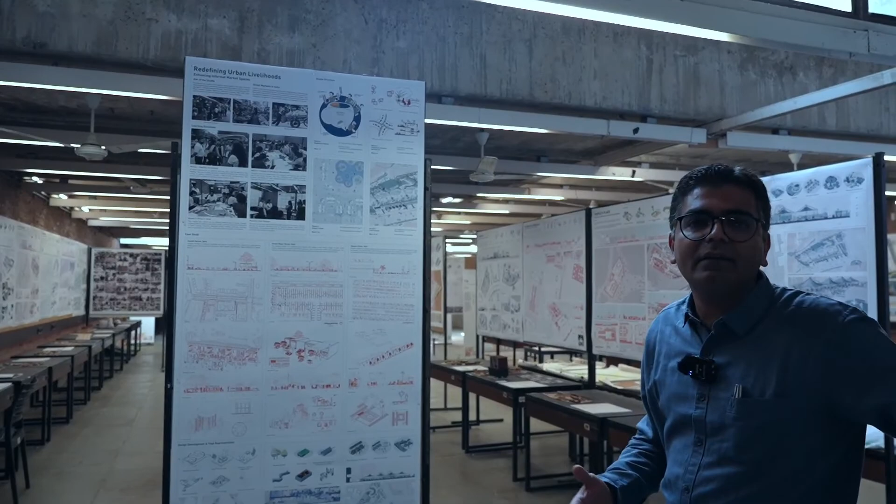For example, this is one L2 studio which talks about redefining urban livelihoods. This studio particularly focuses on designing markets. We've taken sites in Ahmedabad, 3 sites in total, and students also went to Delhi to look at how markets are designed and how they actually function, because markets are a very important part of our city, and it is the urban designer who can look at these markets and design them.

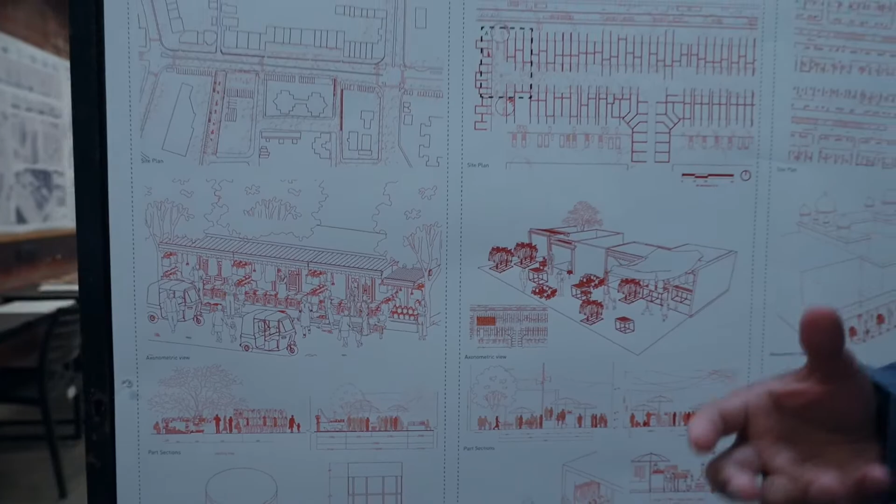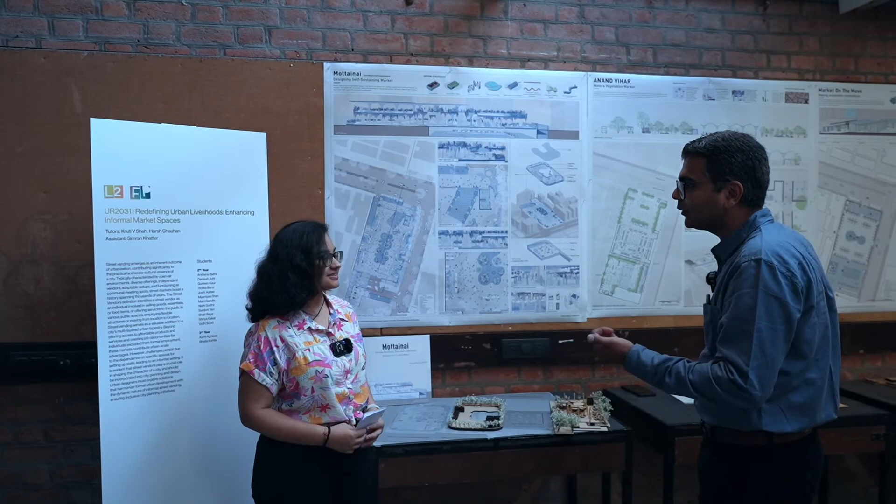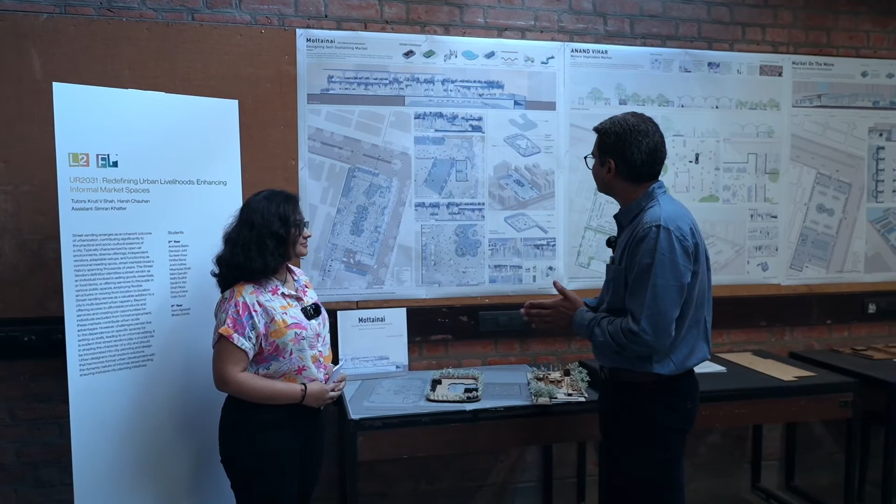With us we have Ishita. Hi Ishita, so you are looking at one of the sites - you have 3 sites, right? Yes - Motera, Vasna and Gatlodia in Ahmedabad. I think your site is Motera. Can you briefly tell us what was your idea behind the project while designing this?

When we asked the vendors and shoppers about the challenges faced in the market, they said that waste is generated and cleared only in the morning, so the whole day waste accumulates. To tackle this, I tried to design a waste management system with on-site composting units, which can be used for the landscaping area and the vegetable garden.

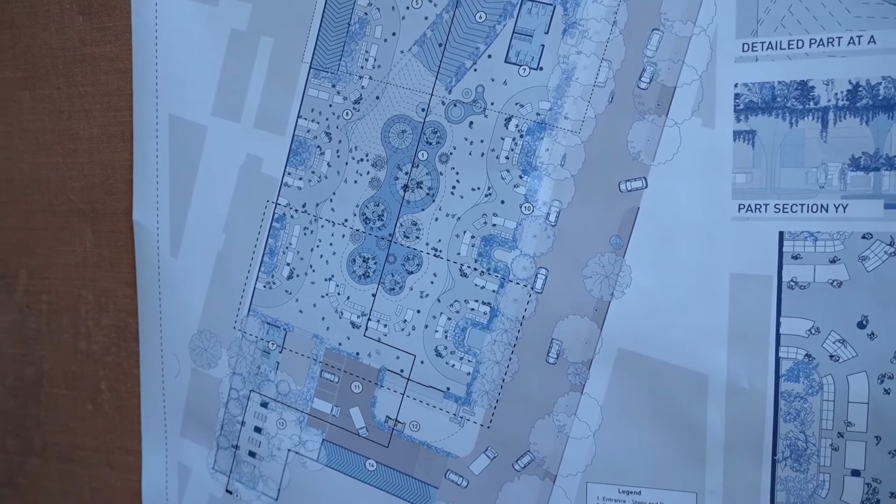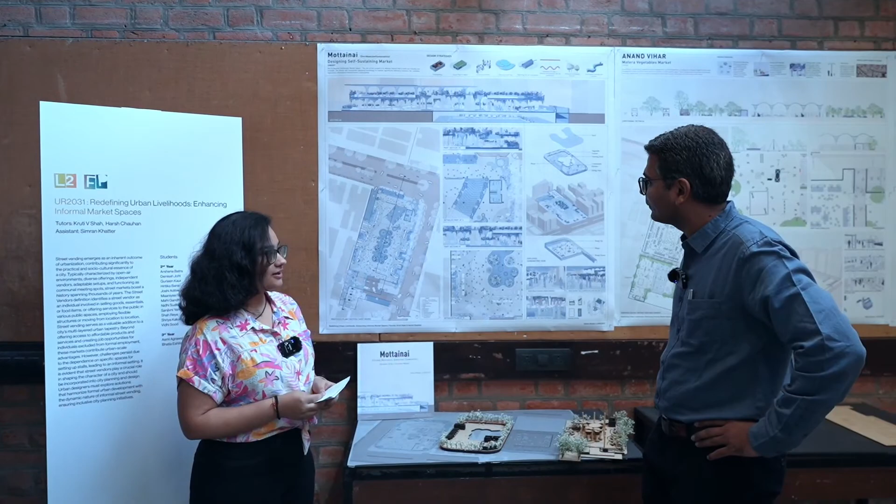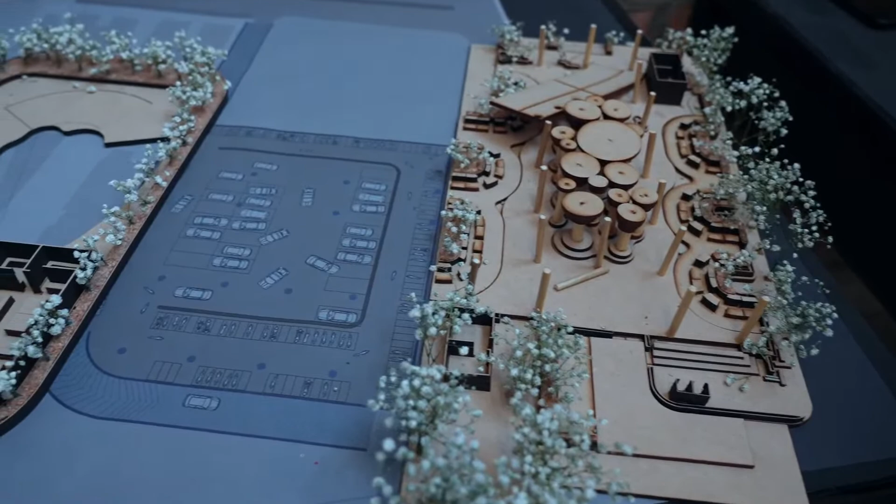Since my site is very near Narendra Modi Stadium, I thought of adding a public space which can be used during major events like the 2023 Cricket World Cup Finals and the upcoming Coldplay concert. I joined the market from the pedestrian ramp from the ground floor to the first floor, where I created a cafe and vegetable market - so now it's not just a vegetable market, it has a layer of public space with a cafe and areas for people to come in.

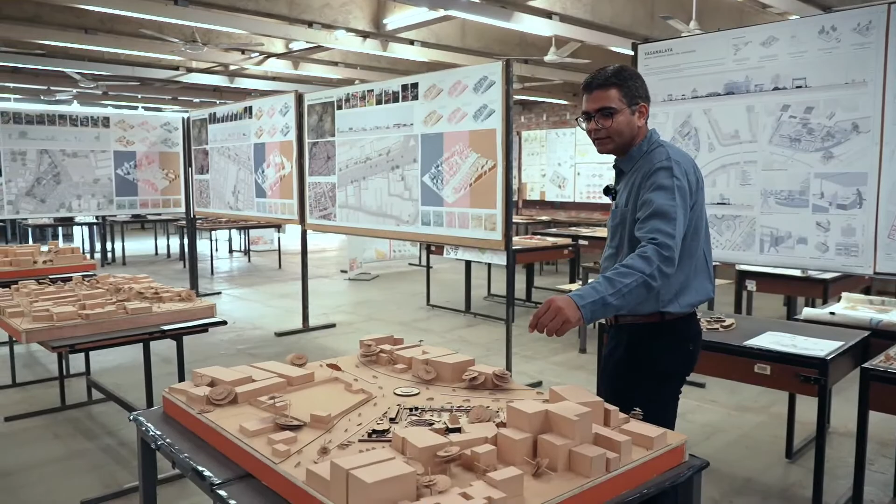So that's the kind of studio that we do. Here are more examples of the work students present - they also went to Delhi and did case studies, studying Chandni Chowk and Janpath Market. These are the kind of drawings we make in the studio. This is site number 1, Vasna - you can look at the overall context where the market is and how students redesigned it.

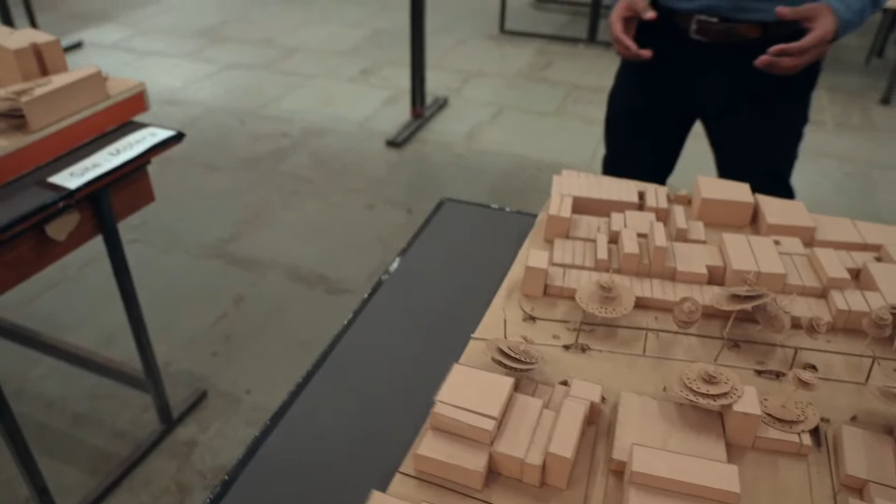This is the site of Gatlodia. Here the market typology is street, because many of our vegetable markets are on the street, where the street is not just for cars to move, but it is also for the markets to happen. So we are looking at how we can design these streets. And this is the Motera site, the corner plot where the vegetable market happens and is happening.

And these are some photographs from the process of the studio. There is a lot of interaction within the students, and we have professionals who come at regular intervals to give us feedback on the kind of projects we are doing.

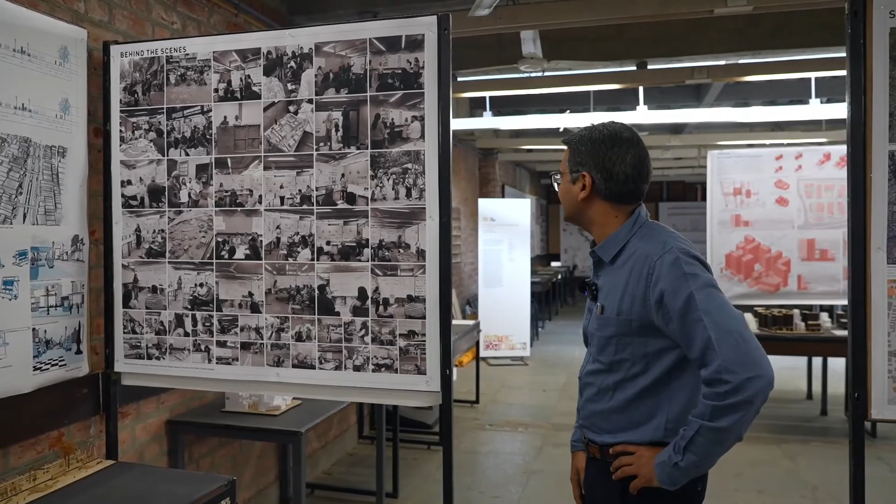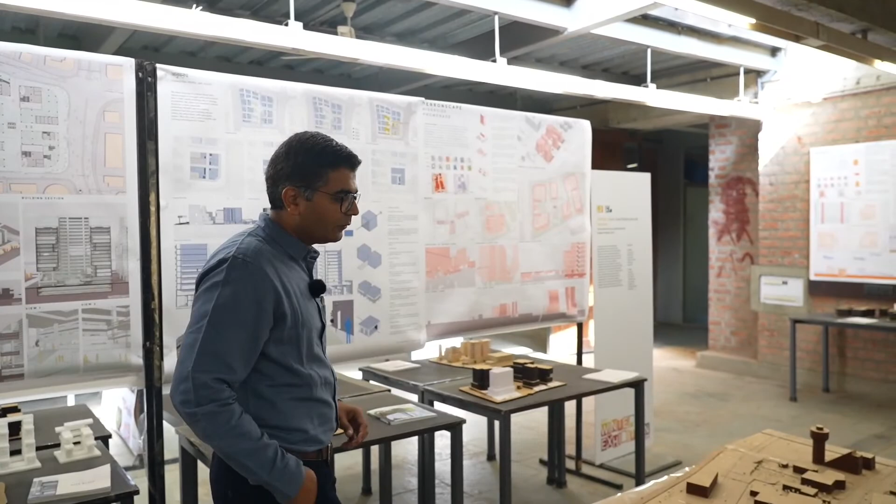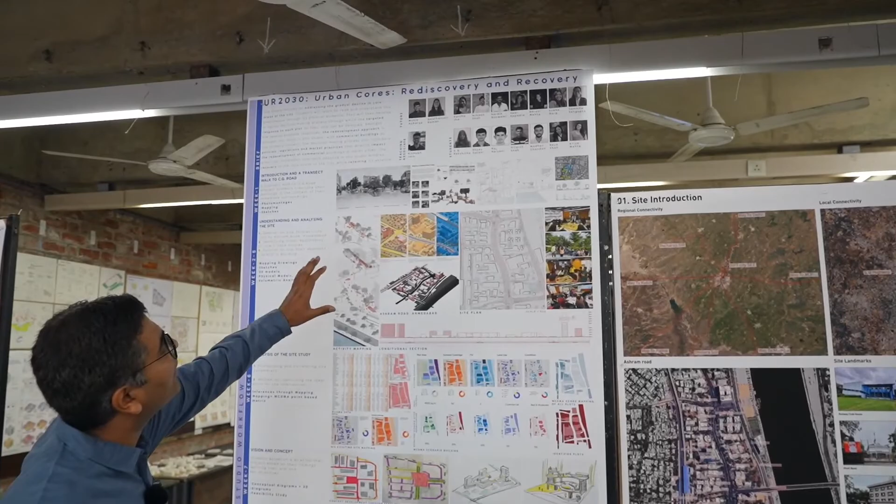Coming to another studio, this focuses on the design of built form. We are looking at buildings, and as an urban designer, what role we would like to play when we talk of the built environment. Here the students have taken a site on Ashram Road, looking at a precinct there. The students studied the existing built form and the GDCR, and did scenario building for what kind of built form would generate if the buildings were to go under redevelopment.

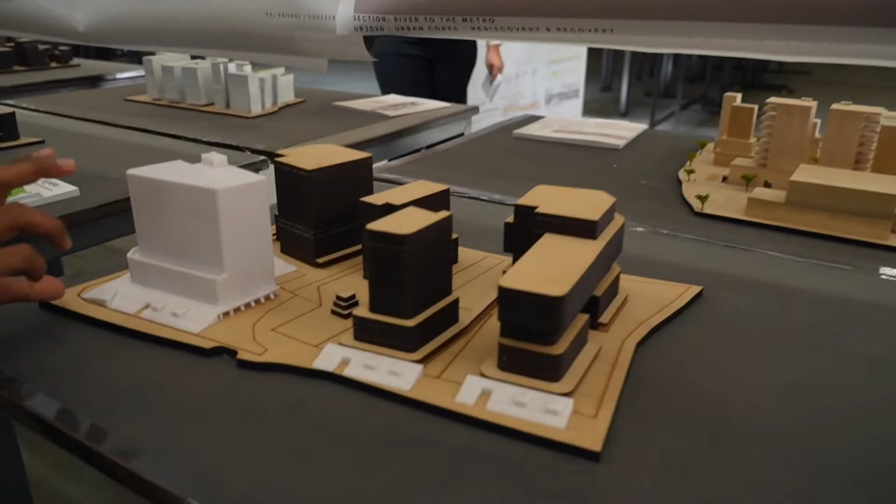Each student takes up one cluster of buildings, and looking at the original private ownership, they come up with ideas on what kind of built form is appropriate - the idea of front margin, podium and tower, and the kind of public realm that could be created inside.

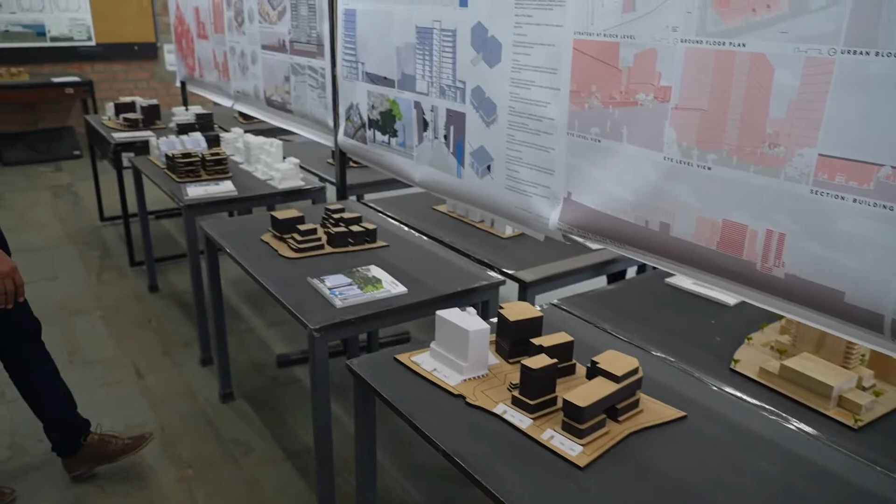So here we have a student who is part of this studio. Hi Hiri. Hello. Can you briefly explain your ideas behind designing the built form here?

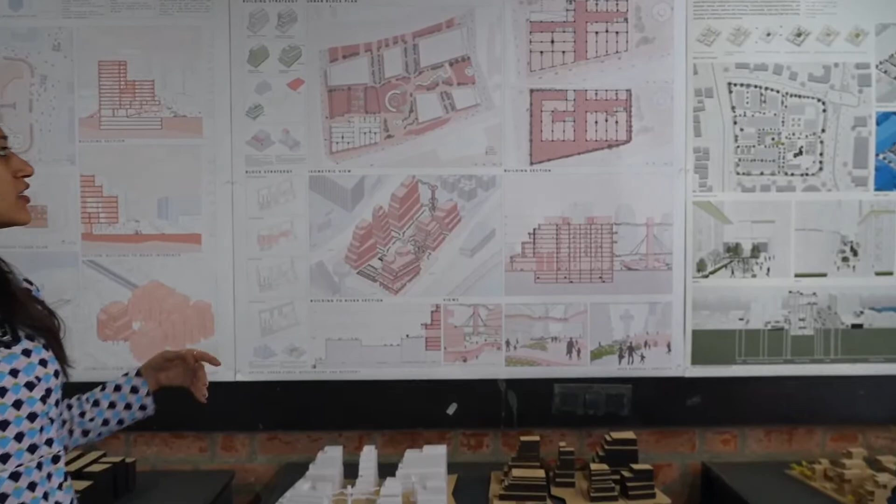Yeah, our site was on Ashram Road, and the plot I had was right opposite to the riverfront. So I had a strategy that I wanted to give all the buildings a view - a river view should be given to all of them.

So I calculated FSI, and I tried to make the first row of buildings a little smaller than the buildings at the back, which I have shown here. We can see they are facing a little higher, and all of them have a river-facing view. I also placed the public spaces at the top, and made a special access that directly goes to the public spaces, so that all of them can have a view.

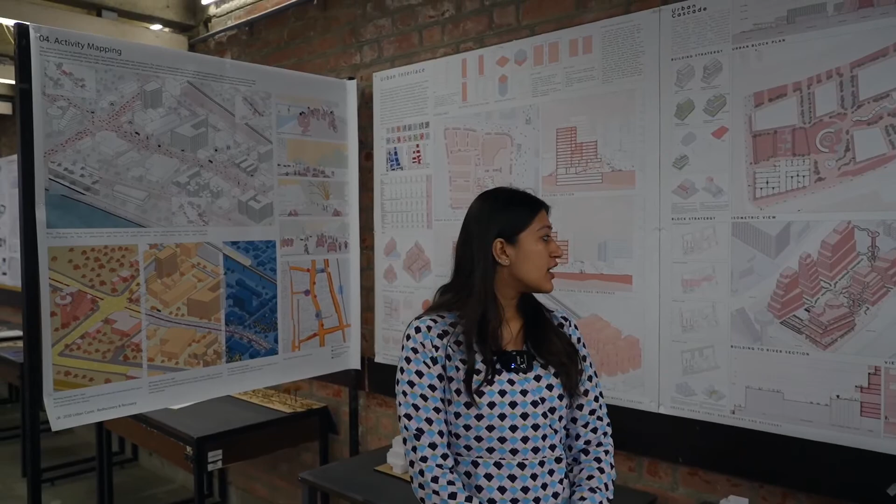I also created a space for vendors between all the buildings, so that they are particularly located at that space. So within these private buildings there is also a public space which is accessible to the common man. Yes. Okay, thank you.

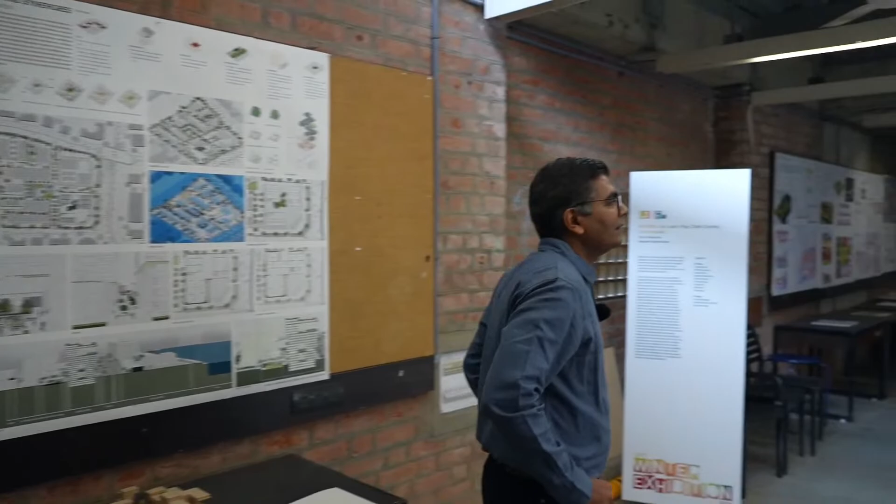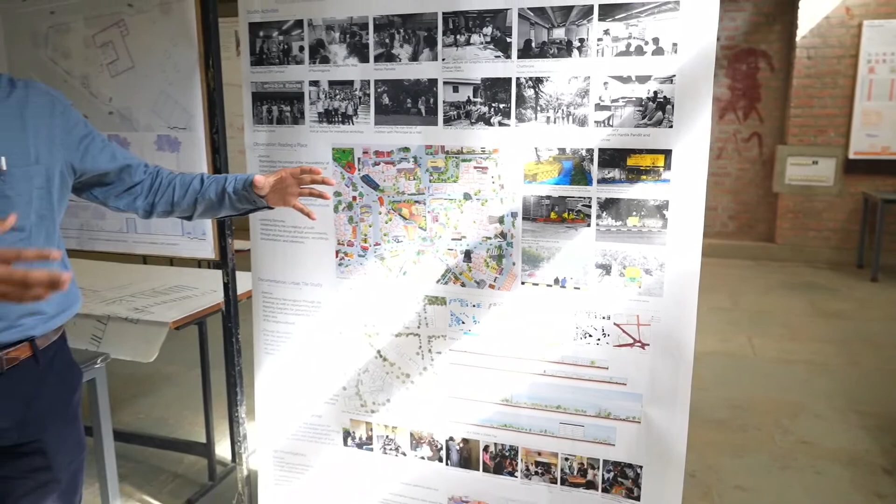This is another studio where the focus is children. There's a global question evolving - are our cities safe for children? This studio, called Live, Learn and Play, is about child-centric urban spaces. We took the site of Navrang School in the Navrangpura area of Ahmedabad, where the project question is to make spaces which are children-friendly and safe. These are the school-going students, and we did interactive workshops with them to talk about how we can create better and safer spaces for children in the city.

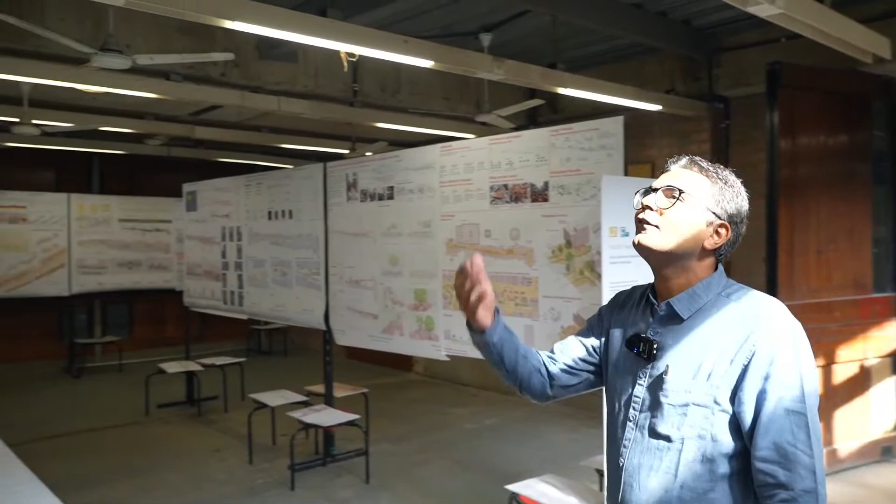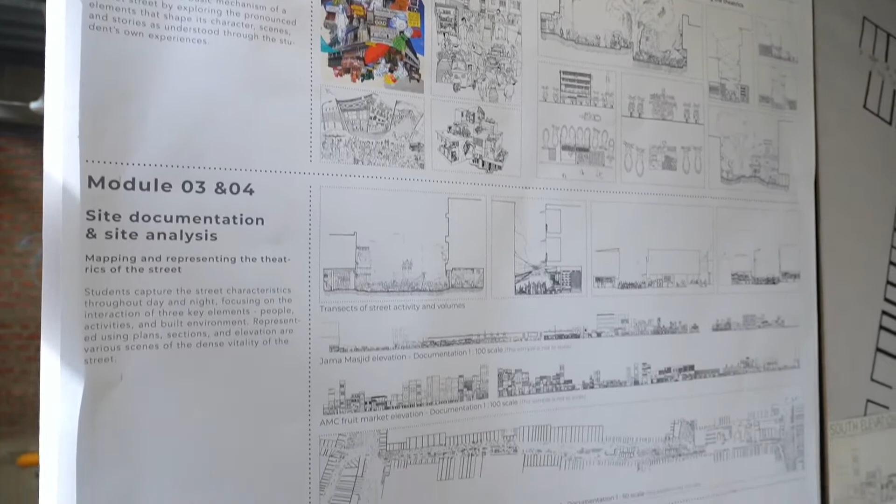We come to another L2 level studio, called Theatre of Streets, because in the Indian context, as I said, streets are not only for cars and automobiles, they are also for the people. So this studio talks about how we can look at streets as a theatre of human performances.

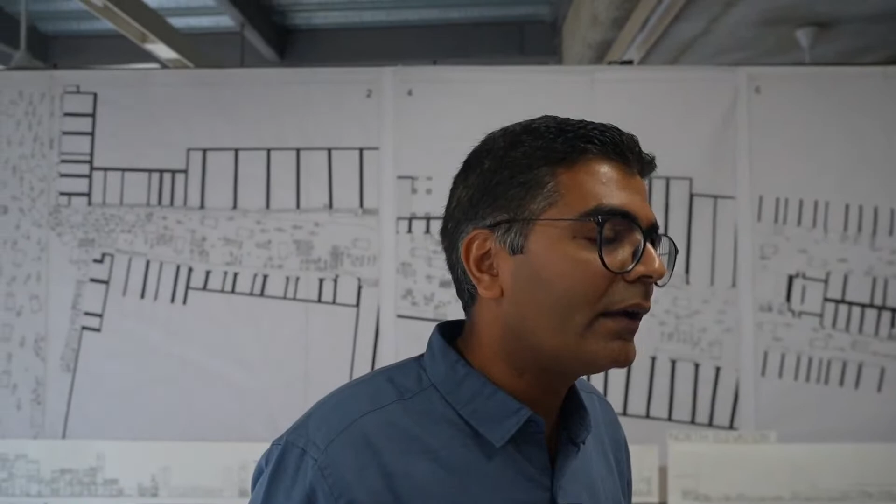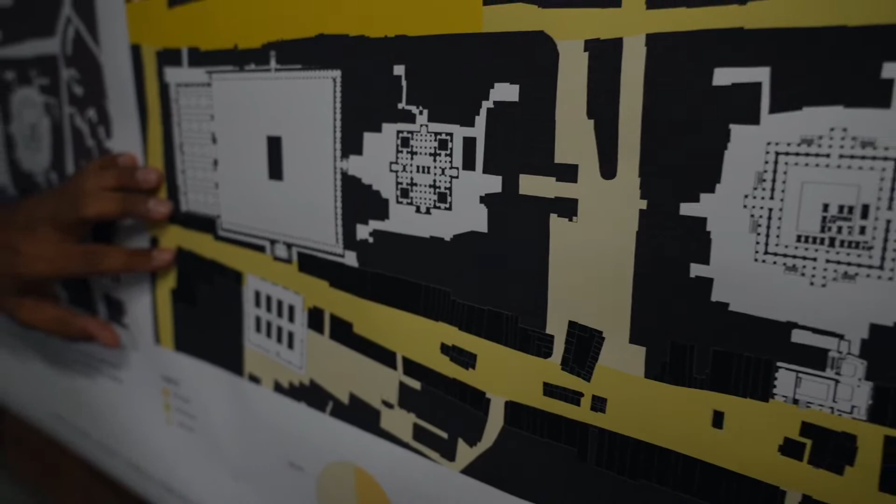This particular studio has taken up the site behind the Jumma Masjid, in the old city of Ahmedabad, as many of you would know. We are looking at the street from the fruit market towards the Raja no Hajiro and Rani no Hajiro. So that's the context of the studio - this is Jumma Mosque, this is Raja no Hajiro, this is Rani no Hajiro, and that's the fruit market. The students have taken this particular street and documented all the activities of parking, vending, and shopping.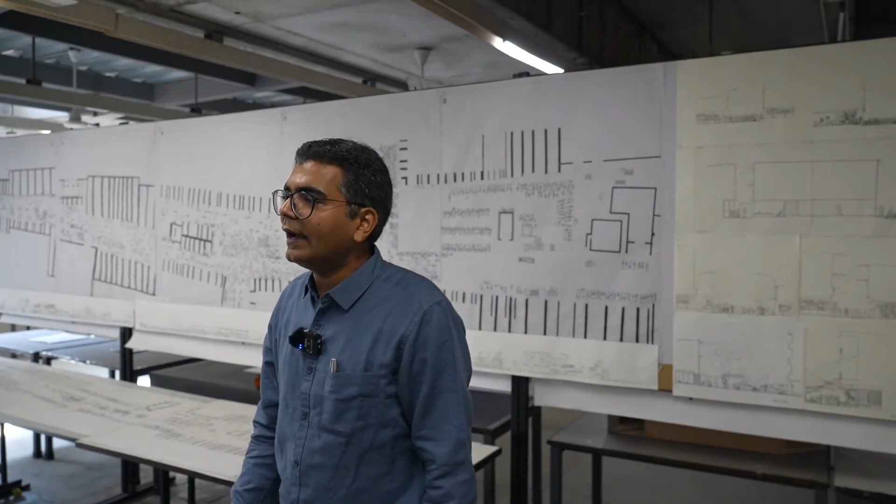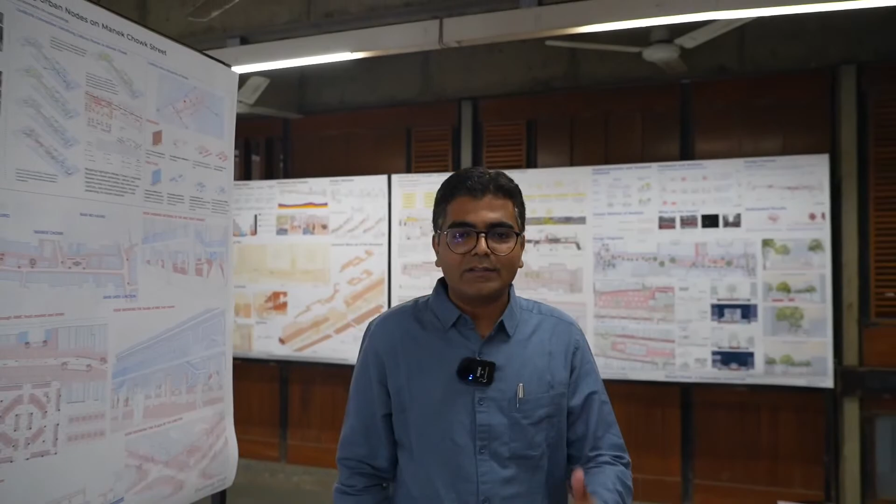It's a very busy street, and with the heritage tag, we are looking at how we can redesign the street. We define the driveway, we talk about movement of vehicles, but at the same time we want the street to be very safe for people to walk in, because it's a very busy shopping street that is there.

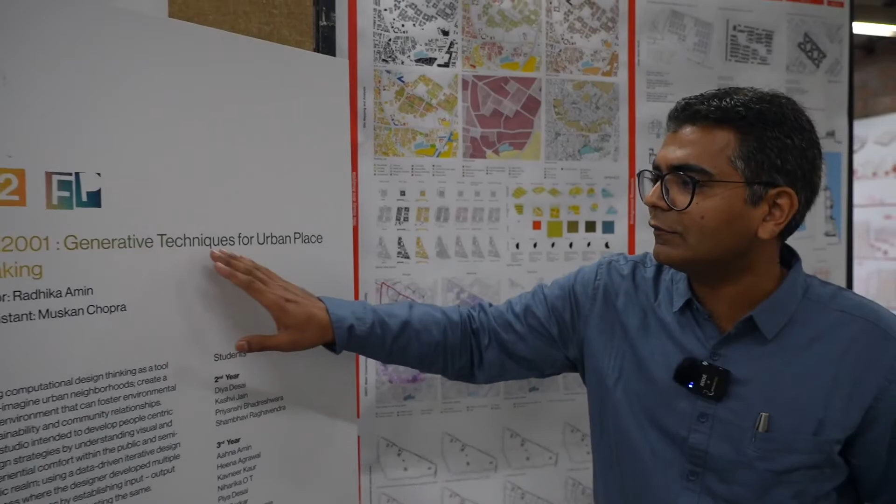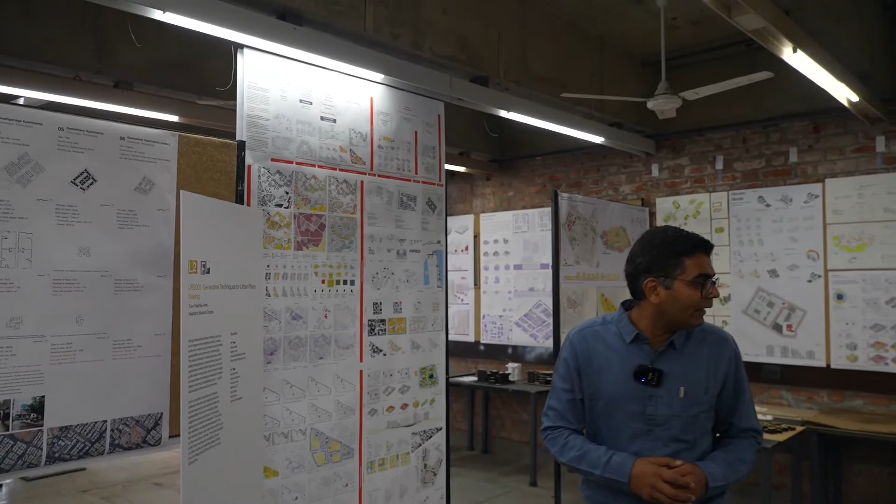So that's the studio which talks about street design. Now we move to another studio which is very interesting and unique. This particular studio is about generative technique. In today's modern world, where we're also looking at data and software use in design, this studio uses the idea of generative techniques - how we can use software and computational methods to derive designs. This is a unique studio that looks at the design of neighborhoods through computational methods.

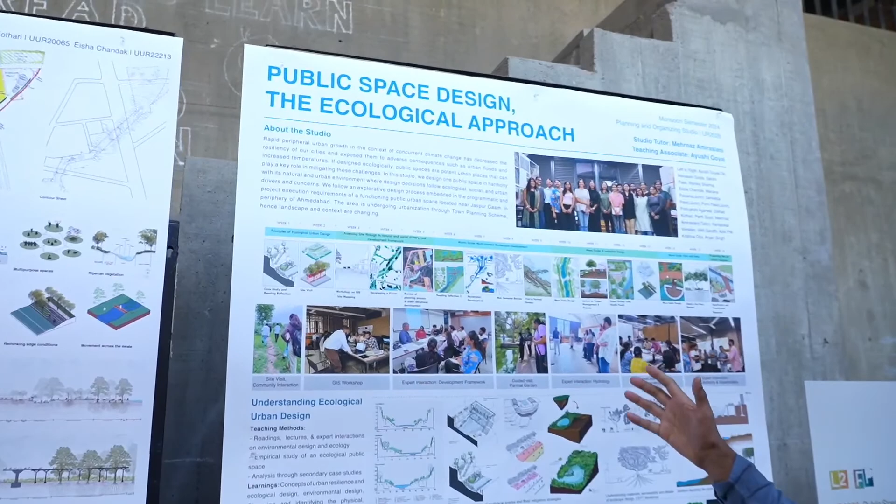This is another L2 level studio where the idea is to look at landscape and ecology to design public spaces. It's called public space design, the ecological approach. Here the problem is set: how can we design better public spaces using landscape and ecology as a tool and underlying layer. Students look at how water moves in the city, study of contour, study of rain, hydrology, and the flora and fauna of the site. That's the fantastic studio which looks at ecology and landscape as a layer.

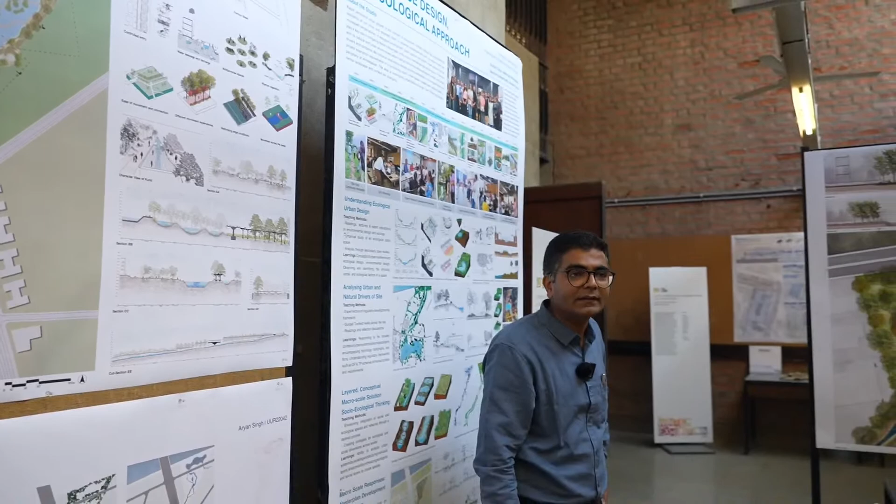So these studios we saw are the L2 level studios. All the students are part of second year and third year. We have 6 such studios which we offered this semester - these are second year and third year students.

Now I'll take you to the 4th and 5th year students, which we call L3 level studios, where the site is more complex. The approaches are complex, where students are looking at various parameters to design the public spaces and regulate the private spaces. I'll take you through the 5 studios we offered this time.

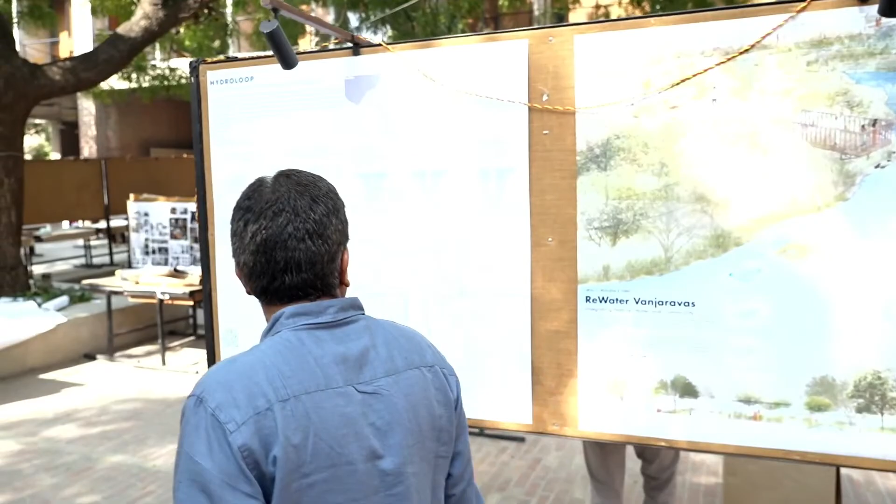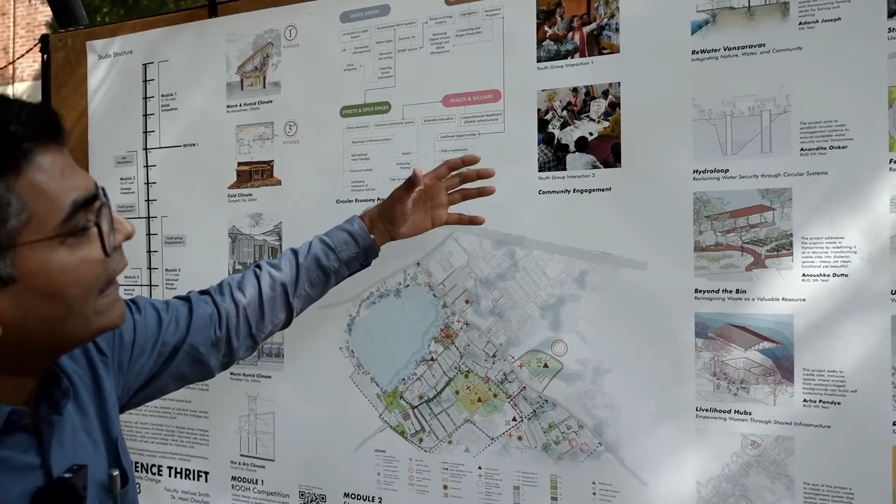As I said, we have a choice-based curriculum, so students are free to choose from the offered studios based on their interest in the subject and site. This particular studio looks at the idea of circular economy and climate change. It looks at a community in Ahmedabad, examining water systems, waste management, streets, open spaces, and health and welfare of that community, with a lot of community engagement and consultation. They work with the community, with constant feedback to understand their real problems and come up with possible solutions.

So we have Tanay with us. Tanay is a student and part of the studio. Tanay, I would like to understand what the studio was and what the proposal is all about.

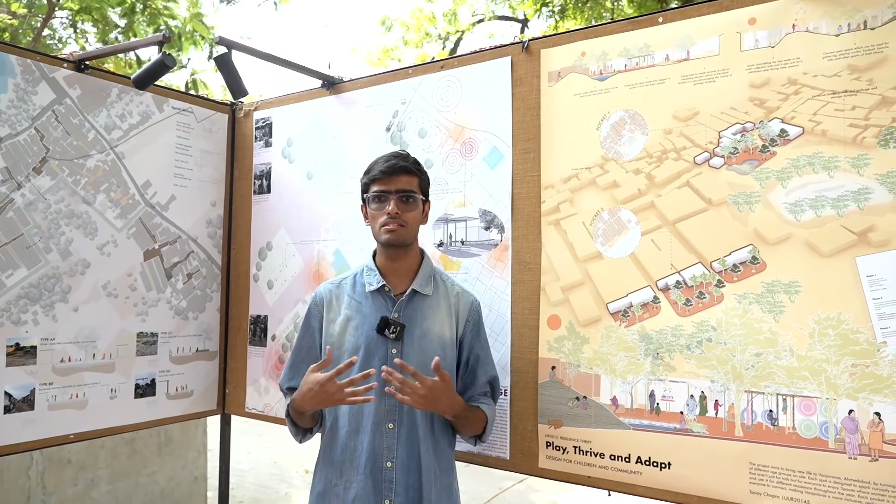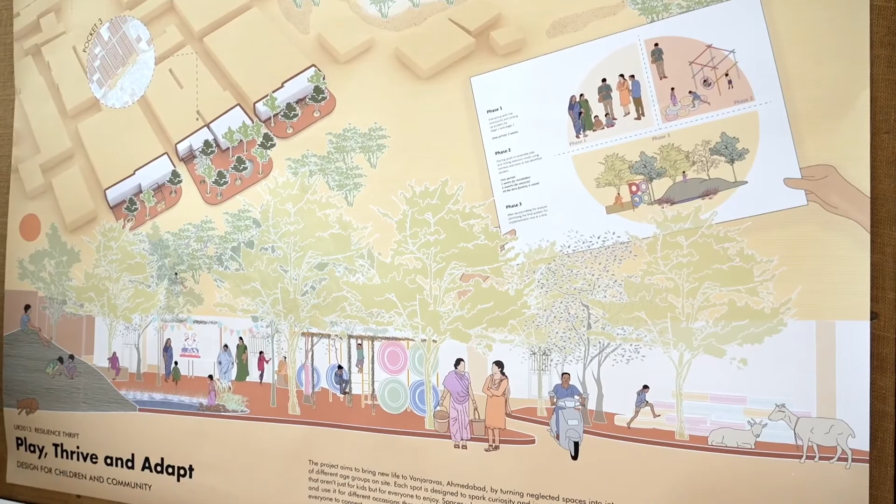The studio was focused majorly on identifying different challenges in the informal community Vanjaravas. Each of us picked different strategies related to water, waste, healthcare, and creating better open spaces. My project particularly dealt with creating better public open spaces, focusing on playscapes as an umbrella term and tackling heat as a climatic challenge.

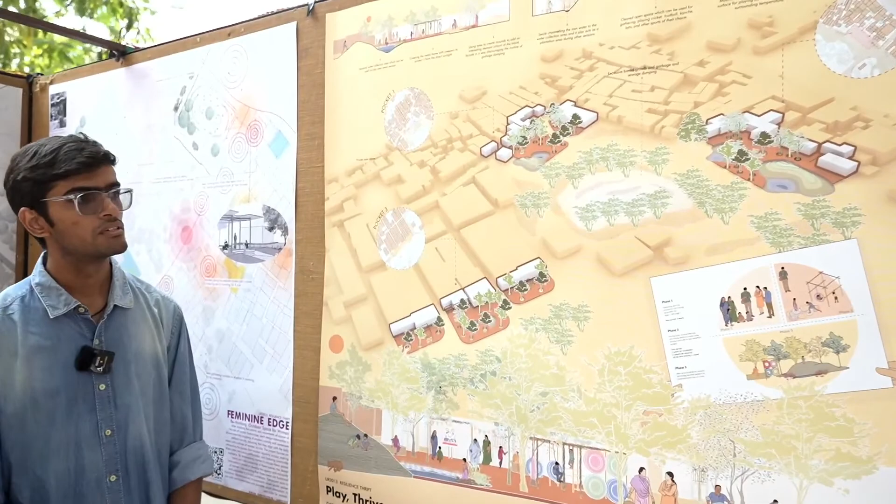So are you intervening in their built environment as well as the community spaces within the settlement? Actually, yes. My project has 3 phases. Phase 1 is interacting with the community and identifying different pockets inside the community and the existing public open spaces that they use.

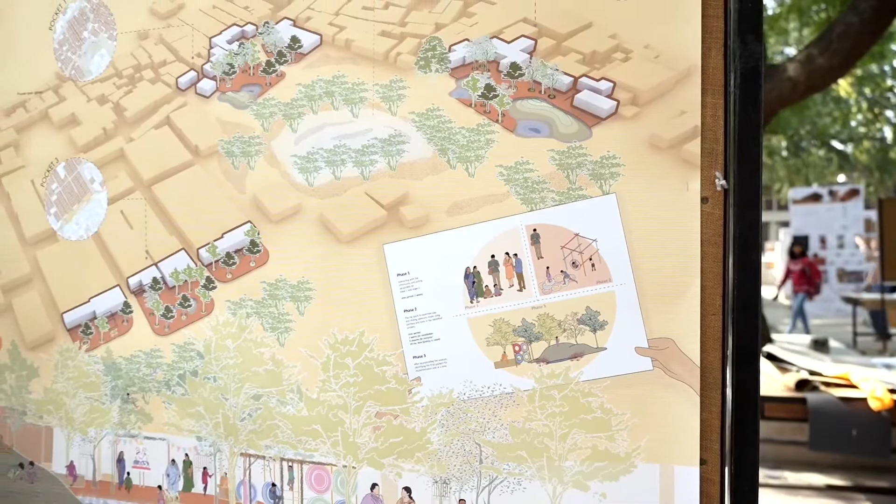Phase 2 is identifying pockets as well as placing quick-to-assemble play elements and shading elements made using bamboos and tires. The third phase is more permanent, using landscaping as a shading technology and method, with mounds, swales, smaller water collection bodies, and paved spaces. So it's a more permanent one, which would ask for more funding. Okay, all right, thank you Tanay.

Thank you. So that's the studio talking about design of community spaces, working with the community as the real stakeholders in the city.

Another interesting studio we are doing this semester is about the urban landscape future. These are fourth and fifth year students looking at how we can create better public spaces which are not just aesthetically appealing, but also very productive and active in nature.

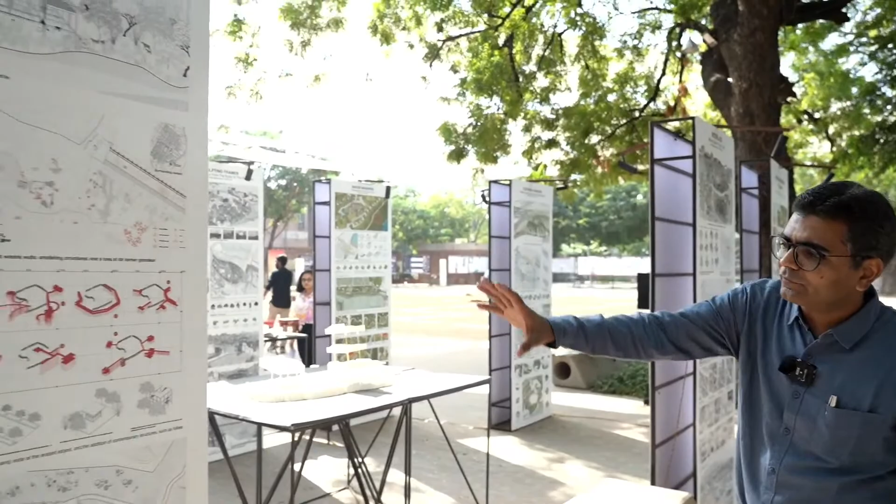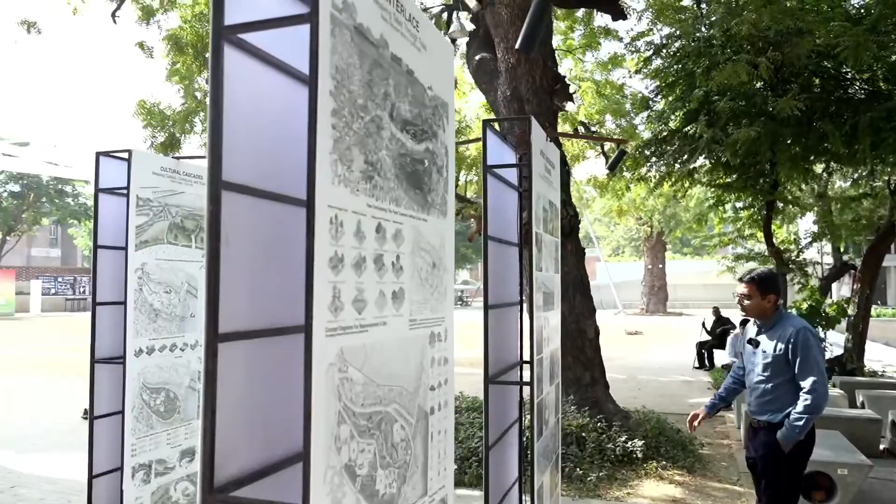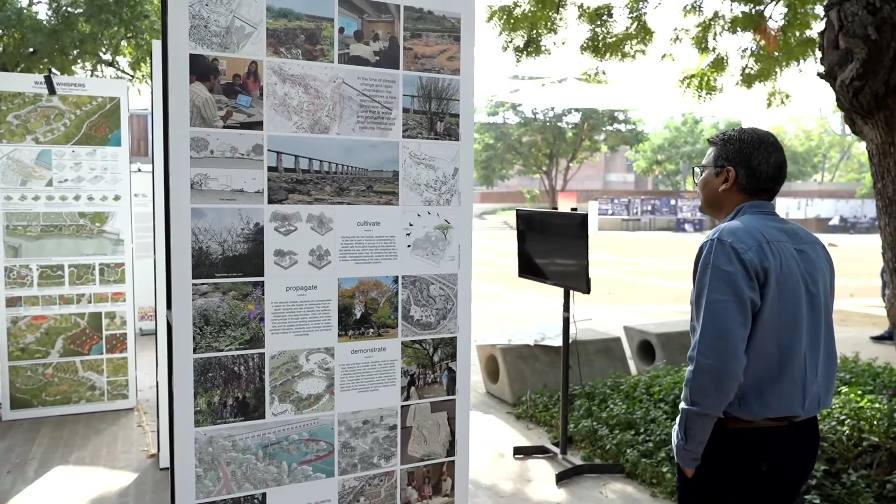That's the kind of student output that comes. If I were to explain the site - we're looking at a site near Gandhinagar, where in this time of climate change and rapid urbanization, this studio looks at how our landscape can be more productive rather than just aesthetic. The students come up with beautiful drawings and proposals for this particular studio.

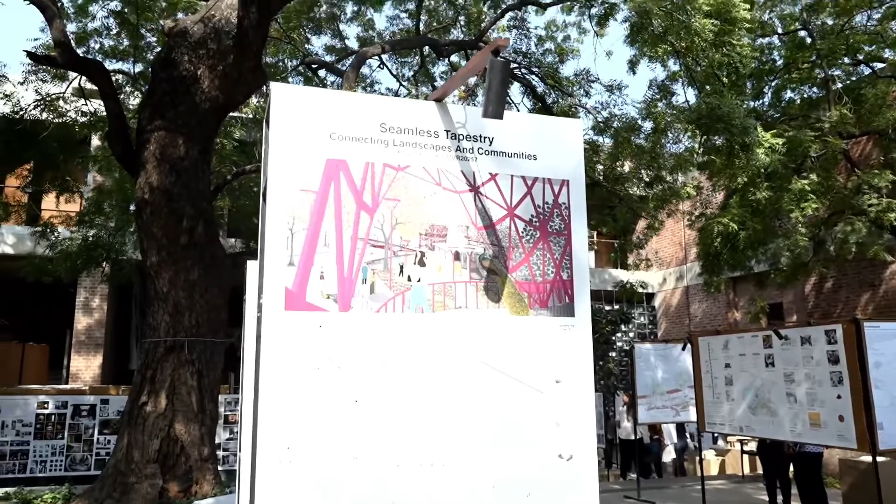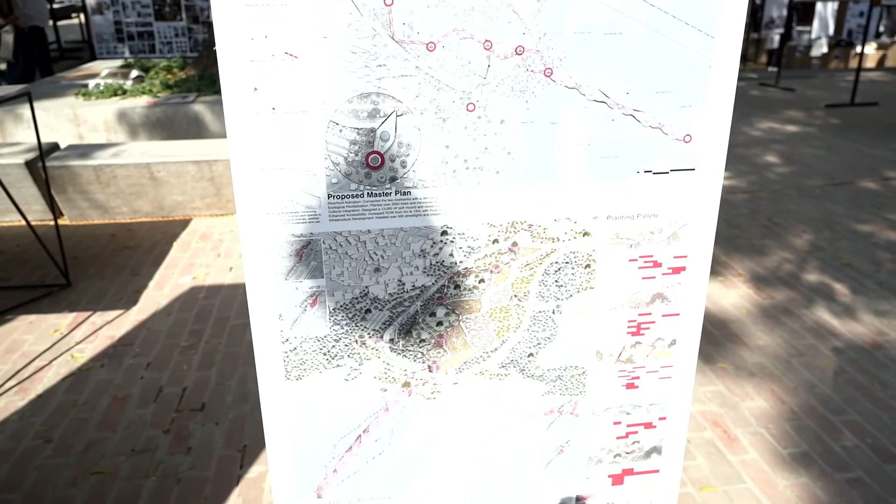Yeah sure sir. My project, Seamless Tapestry Connecting Landscapes and Communities, focuses on a dynamic yet underutilized site near the Sabarmati River edge, next to the Sant Sarovar Dam. The site is between Gandhinagar and Gift City and has a lot of urban potential, yet faces issues with accessibility and land degradation. The design strategies include expansion of accessibility in terms of elevated trails, secondary and tertiary pathways, and a 36-meter wide bridge deck which connects both river edges.

I have dedicated productive farming spaces with sunflower and mustard, which helps in phytoremediation and stabilizes the slope. Over 2,000 trees were planted with 40 new species, which boosted ecological diversity. A dedicated cultural space near the river edge was also given to make sure it plays an important role for the local people of Indroda in daily life.

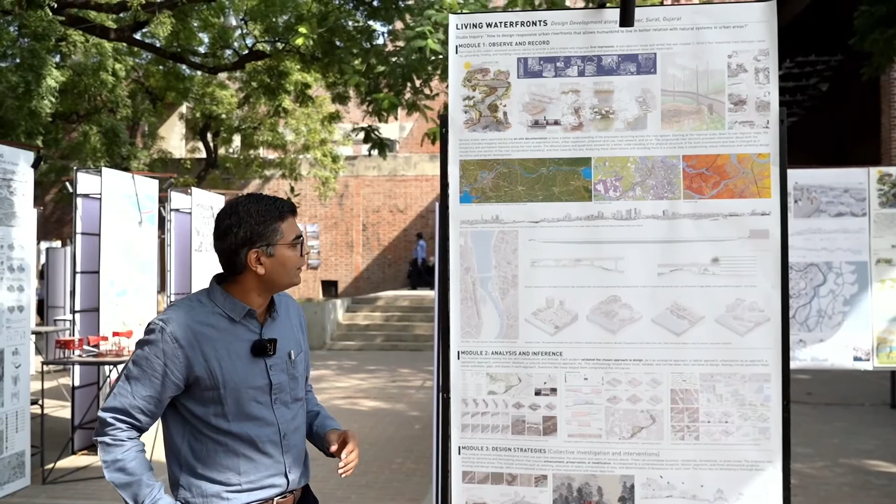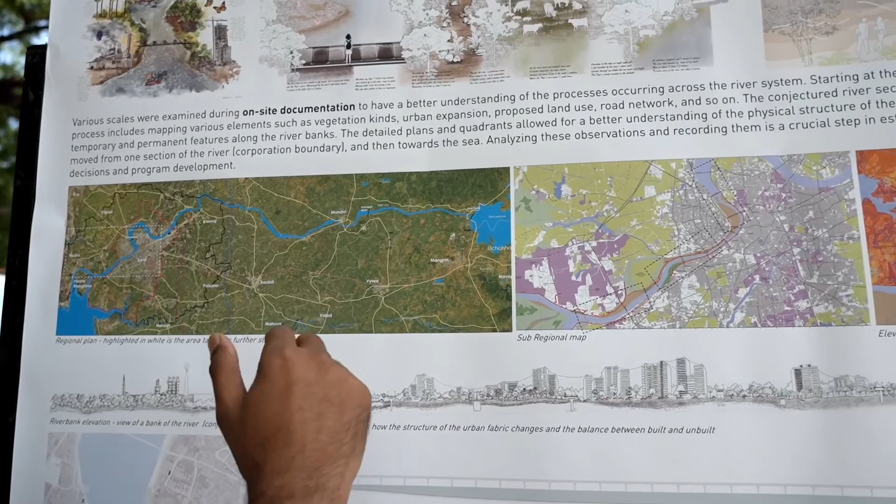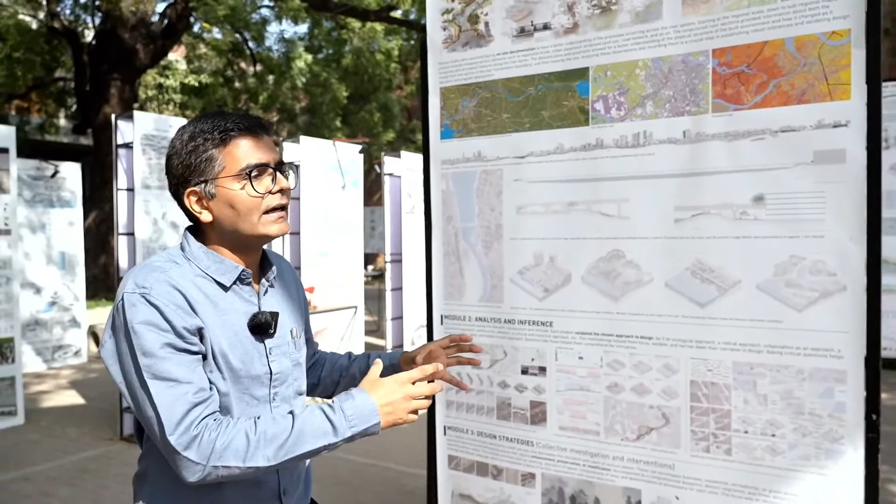So we look at one more studio which is Living Waterfronts. This particular studio is currently looking at the case of the Tapi River in Surat. The studio looks at the riverfront project of Surat, and the students have taken up a part of the overall river edge where they're studying the flora, fauna, hydrology, town planning schemes, the slope and the contour, which is very important to design when we work with water. This studio looks at the riverfront, and students have their own idea of what can be various ways of doing riverfront in the Indian context.

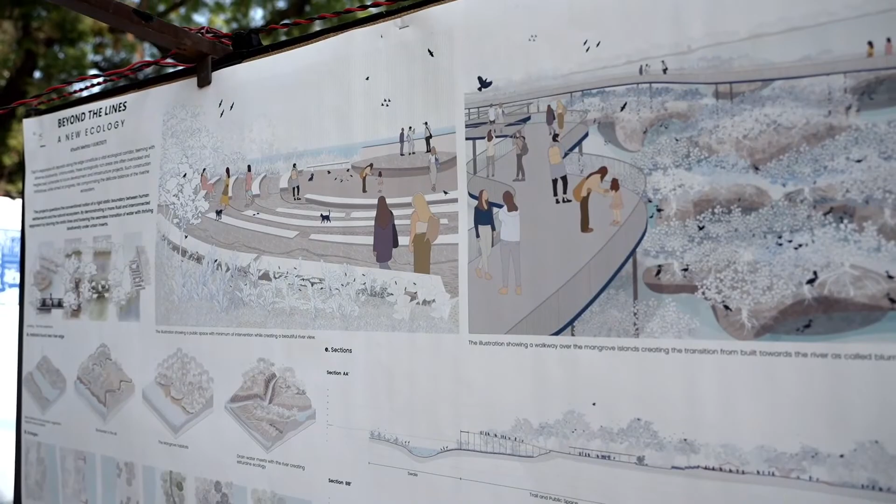Some of the examples are also looking at dense vegetation and more use of landscape to stabilize and address the river edge condition. Depending on the context, the students come up with their own ideas. After a lot of studies, they come up with their own ideas of what could be the edge condition. So that was the Surat studio.

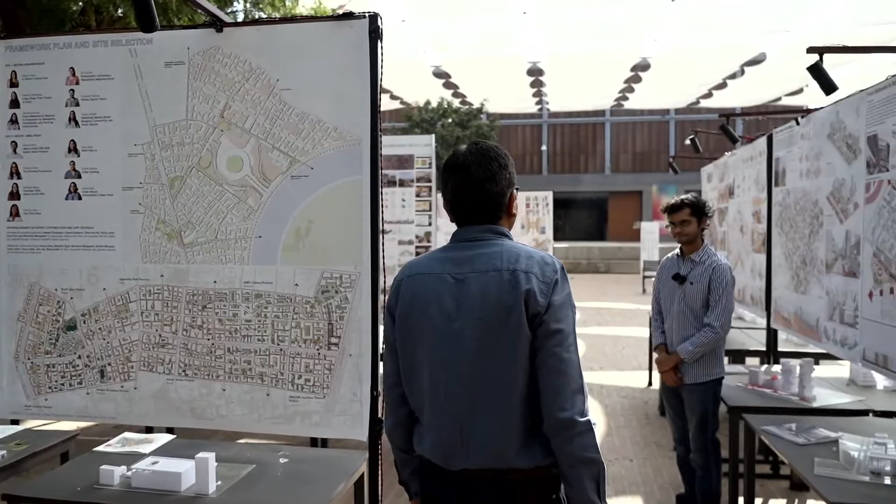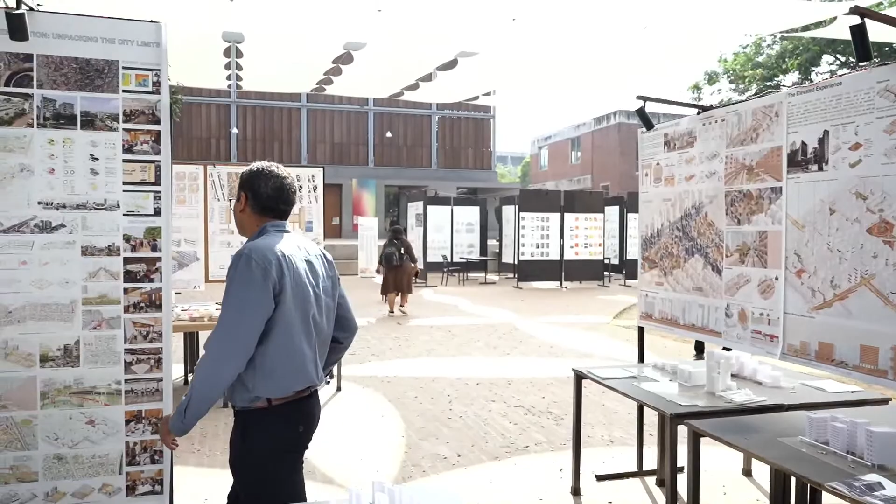This is one more L3 level studio which looks at transit oriented development. We're looking at two sites in Ahmedabad: the Bopal Ambli corridor, and the Motera Stadium precinct. These are the two areas where we are looking at how cities can now look at transit oriented development, where we look at the metro corridor as the catalyst for redevelopment which is happening here.

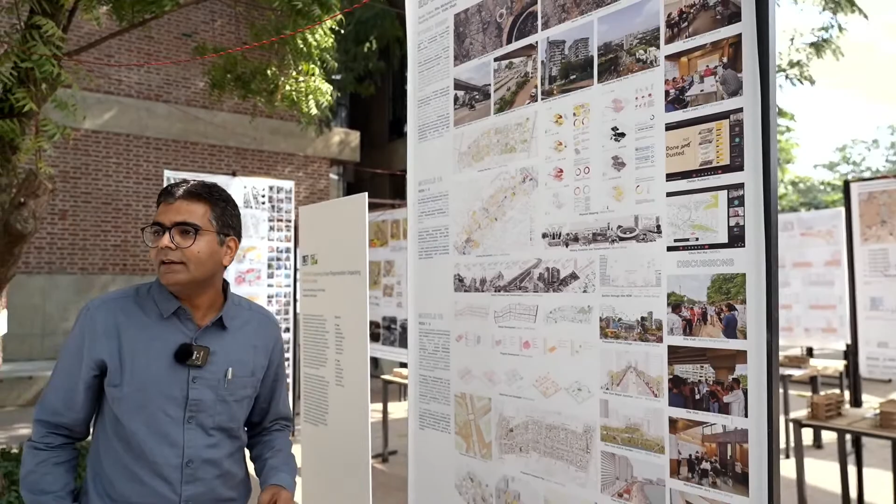So hi, we would like to understand your project in more detail. Yeah hi, my name is Ramit Sinha and I'm a 5th year student. In this studio, as sir mentioned, we have 2 sites, and since both sites are so huge, I personally had the site of ISKCON Ambli Road, which is a stretch of almost 3.2 kilometers long.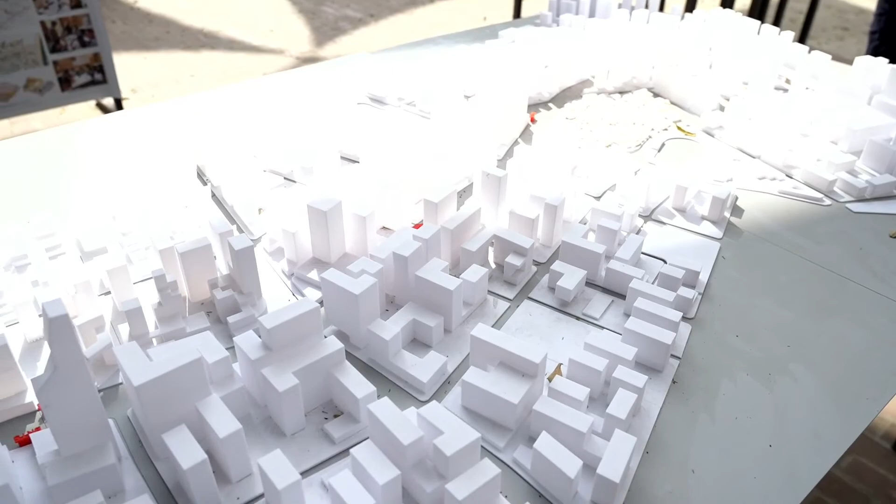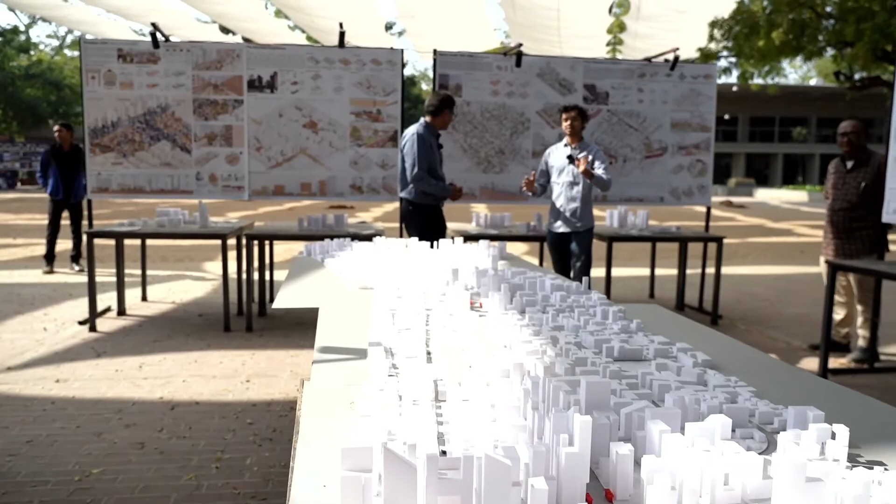Often in urban design, when the scale is so huge, we have to work in groups. So it was a joint collaboration and effort of almost 7 people. We devised this framework plan along the ISKCON Ambli main road. The main idea was there's already an existing transit line, so how do we design along that, and how the development is happening vis-a-vis that.

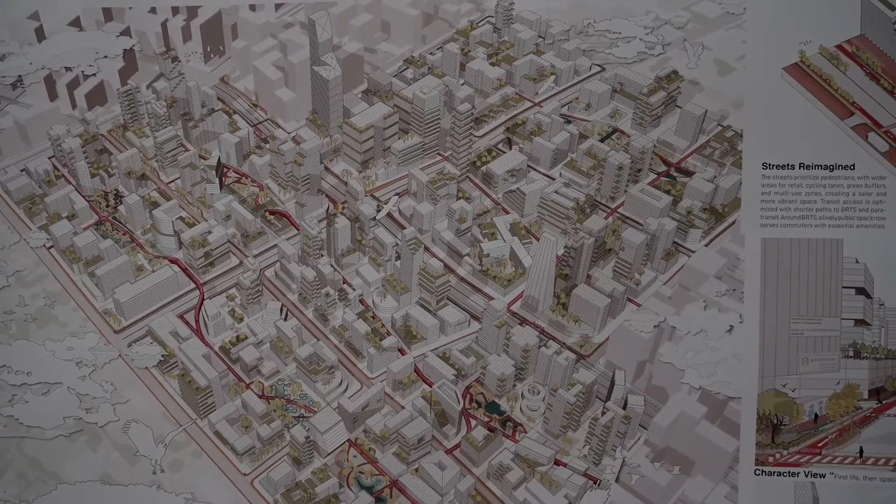So within that, you have taken up a precinct and developed a detailed idea of what kind of building should come up there and what kind of street design should happen. Yes, okay great. So that's the Bopal Ambli project that he explained.

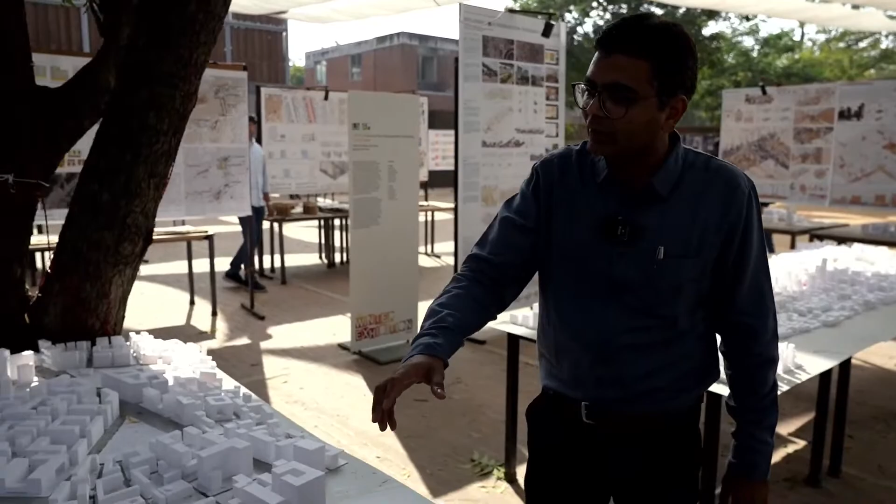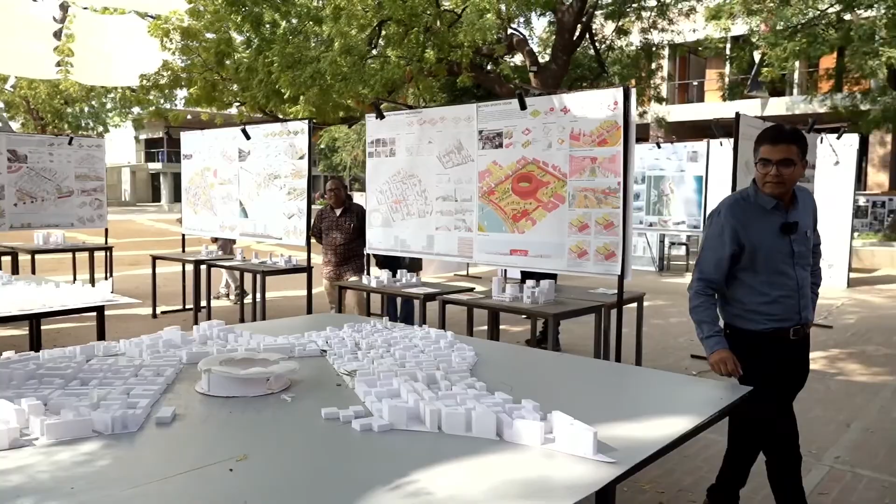In addition to that, we also have the Motera Stadium and its surrounding areas, where we are again looking at the metro corridor and what kind of newer development should happen there. So that was the transit-oriented development project.

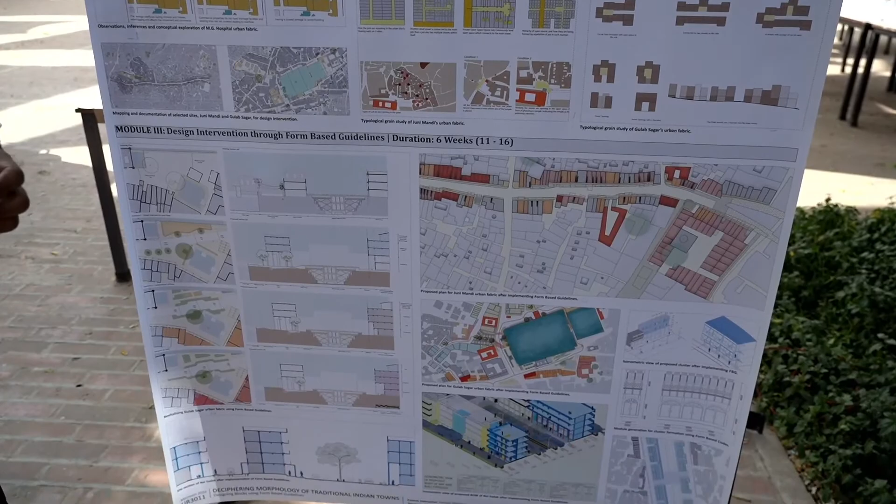We have one more L3 studio where we are looking at the traditional city. While the previous project spoke about the modern city and global ideas, here we are looking at the study of morphology. We are looking at traditional towns of India, and if we as urban designers were to intervene in these traditional towns, what is the kind of study that needs to be done? What are the things we want to take forward? What is our traditional wisdom and learnings?

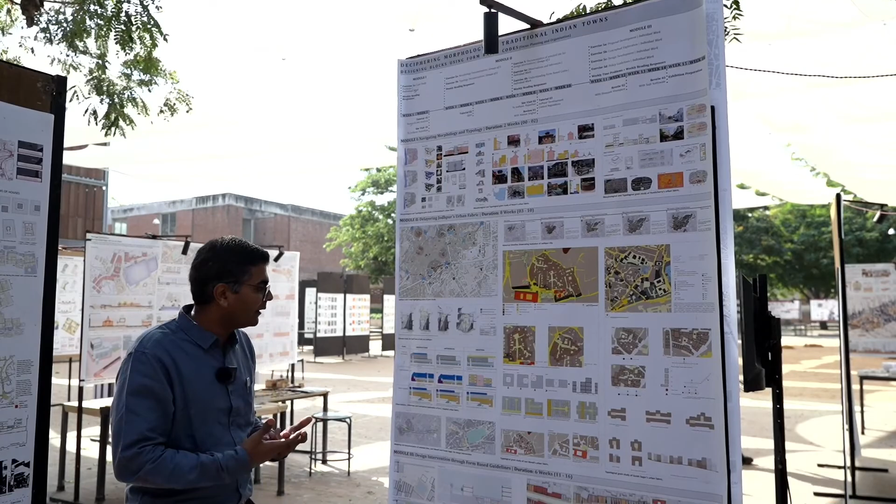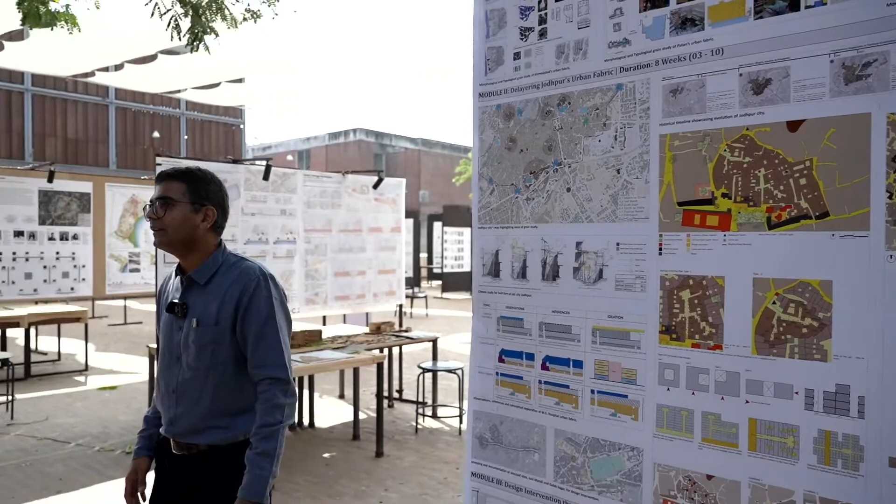In this 21st century, with the idea of aspiration for a better life, what kind of built environment are we talking about? This particular studio looks at the study of traditional towns and intervention within that. The studio looks at the city of Jodhpur, studied it, and now they're trying to intervene within the old city. So that's the kind of development the students are proposing if we were to intervene in traditional towns.

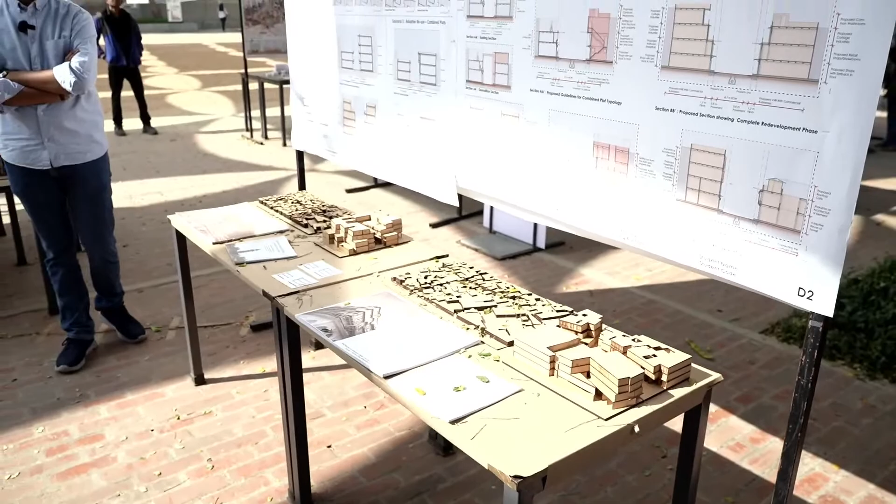Within the L3 level, which are the 4th and 5th year students, we also have a part of an exchange program. So with us we have Dhyan, who was an exchange student. Can you please share your experience?

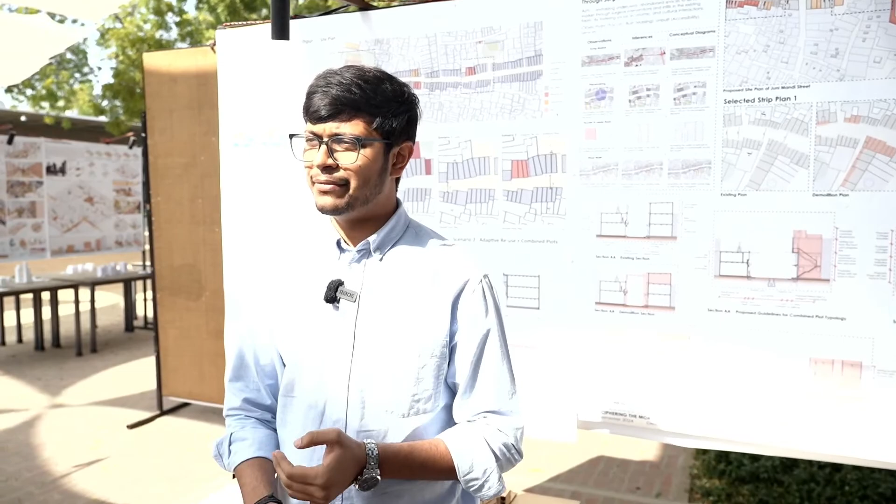I went to Paris, to Ensa Malaquais, which was more of a Masters of Architecture course there, and the exchange went quite well for me. We intervened with studios and mandatory courses, and for our studio our primary focus was on two French aspects: the 'sol', which is ground and floor, and the 'toit', which means roof. We were deciphering and comparing the two cities of Ahmedabad and Paris, and how things were working out.

Regarding the mandatory courses, the first was about contemporary architecture. We went to various Paris museums like Centre Pompidou and other contemporary structures, and decoded those elements. Then we focused on global modernism, the second course, in which I researched African mud mosque material techniques and how sustainability was incorporated.

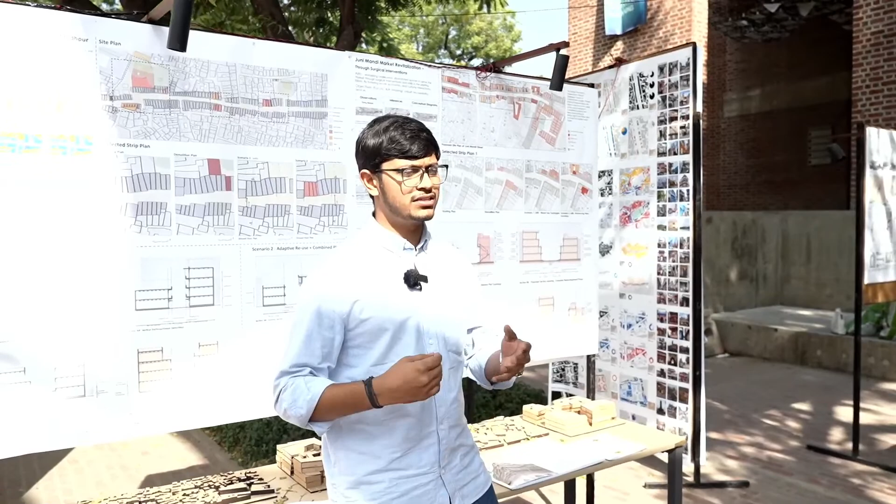Later, adding to that experience, I traveled to 10 European countries, which gave insight into how things were working out. In Amsterdam, the canals played a cultural role. The second city was Rome, with its historical landmarks, and Copenhagen, which primarily focused on urban design and sustainable solutions.

To sum up my 5 years of experience at CEPT, it was quite good for me, right from late night studios to supportive faculty discussions, great friendships, and table tennis to balance out the intense work and learning. After 5 years, I got placed by the placement cell at CEPT at Urban Smart Spaces, where I am applying my urban design and architectural skills to real world examples. It was very helpful. Thank you, Dhyan.

Now I would like to introduce Professor Rajiv Kadam, the program coordinator for Bachelors in Urban Design. Welcome. Would you like to add to this?

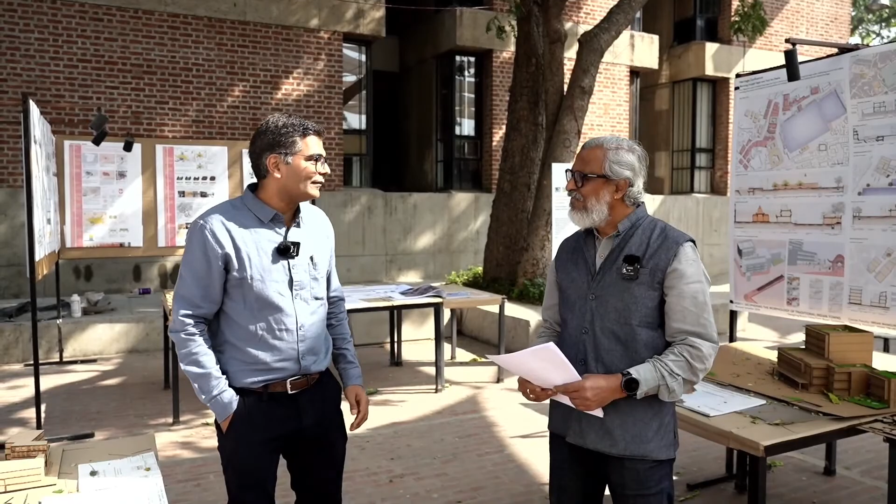I am Rajiv Kadam, Associate Professor and Program Coordinator at Bachelors in Urban Design. I hope you got a good view of what the Bachelors in Urban Design program is and what kind of work students are doing. Students do very hard and rigorous work because that's what makes a better professional, and because of that, CEPT University has been recognized as a Center of Excellence by the Government of India. Along with the hard work, CEPT University is a beautiful campus, one of the finest designed by one of the greatest architects, Professor late B.V. Doshi. Students, along with their studies, also initiate cultural activities, workshops, academic lectures, and invite outside professionals to talk to them, so they are very active academically and culturally, which is part of what we believe in.